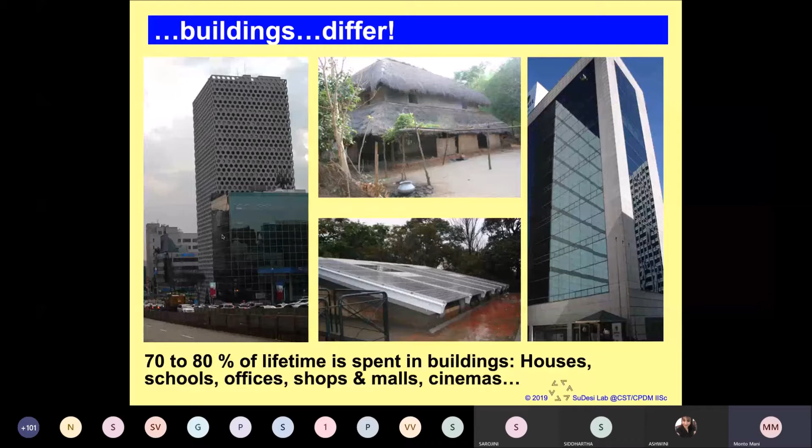Now, with COVID, the environment has also recovered very fast. In fact, we've been able to achieve a significant share of the Paris Agreement in terms of emissions control without doing anything at all in the last 4 or 5 months. So if we relook at the post-COVID situation and the new normal, people's concern towards the environment is far greater now, and the sensitivity of our impact on the environment will also get greater scrutiny. This is good data from a book called the Zero Energy Development Book, where they looked at ecological footprint versus satisfaction with life.

At one point in time, satisfaction with life or lifestyle was measured in terms of our income, GDP, right? How much cement are we consuming? If you look at industry growth, it was measured in terms of cement consumption or cement being manufactured. Today, all of us know the green building rating system actually appreciates us using no cement at all or using very little cement, right?

So ecological footprint is the land mass required to support the lifestyle that we have. So if I'm wearing a cotton shirt, it is growing somewhere, it is getting processed somewhere, it is getting dyed somewhere. So if I start looking at the land area that is required to support the products that are in my lifestyle, my energy requirement comes from, say, photovoltaic plants, which are put in some desert somewhere. So its unit is global hectares per capita.

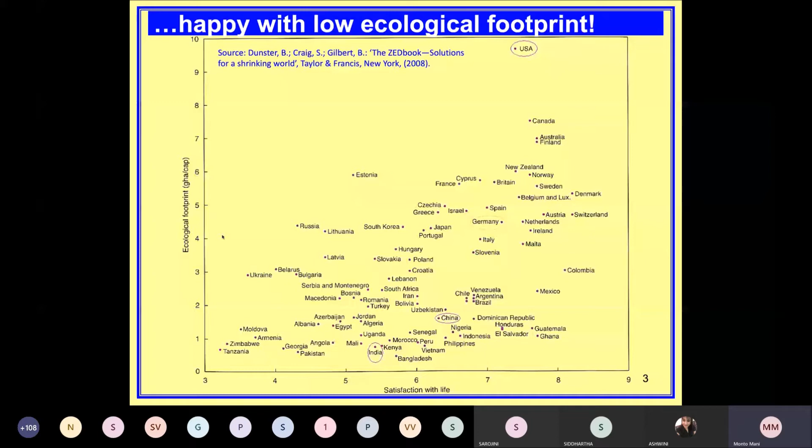And that has also been challenged now with the COVID situation: do we need to travel 2 hours to our offices when we can work from home? Those 2 hours I get additional to spend at home, I can utilize towards something else, towards my children. And at the same time, not carry the stress to office attributed to the traffic that I'm facing, right? So across the world, there is now a relook at reconfiguring the concept of work itself.

Now I will also come down to distinguishing between energy zero and zero energy. The house on the left is a house in rural villages, and that house, when we were starting to study it way back in 2004, did not have electricity supply at all. And electricity supply is the modern face of energy.

Now the question here is, do we call that house zero energy because they don't utilize energy the way we do? Or my lab on the right-hand side, where we are trying to generate as much energy as we consume, and we call it energy zero, right? And then I get points for my green rating system and all of that. So if you see, both the houses are not the same, though we might assume that both are zero energy, right?

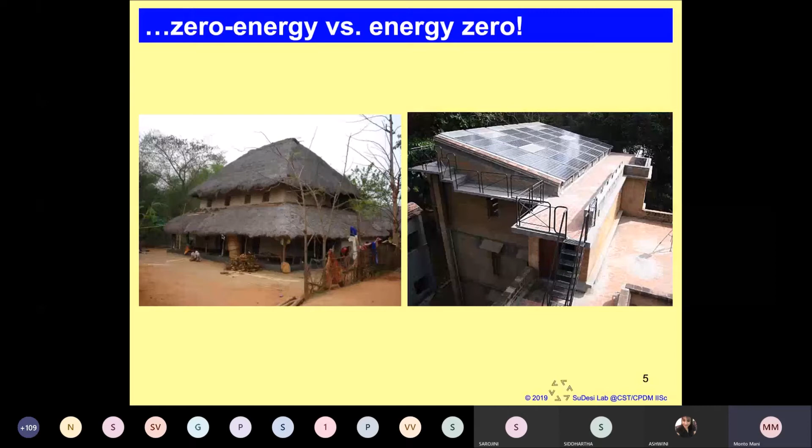And this is where we have another challenge in terms of our energy footprint, life cycle energy footprint in dwellings. If you look at operational energy on the right-hand side, the right-hand side bottom is a vernacular dwelling, where operational energy, that is the energy required to keep your houses safe, well lit and comfortable. Like right now, we're probably sitting in each of our houses with a computer running, light on, or maybe in an air-conditioned office, right? So those all will contribute to operational energy.

Embodied energy is the other factor that is important. It is the energy going into the manufacture and transport and commissioning of the materials that we use in buildings, right? So if you look at traditional buildings, embodied energy is less than 2 gigajoules per meter square, and operational energy is less than 1 gigajoule per household per year. For a city dwelling, that operational energy goes from 1 to 15, and embodied energy goes from 2 to 4. Whereas for a modern dwelling, the operational energy goes from 1 to 42, and embodied energy goes from 2 to 8.

So can you imagine that with India and China having about 1.8 billion rural population, if their lifestyle energy is going to multiply by 42 times, where do we have the energy and resources? It might be good for the economy, but can the economy sustain with the biodiversity and the resources being completely exhausted? So that is also another challenge that we have as to how do we address their aspirations for a modern house without impacting the environment as much. And these are realities that are facing us.

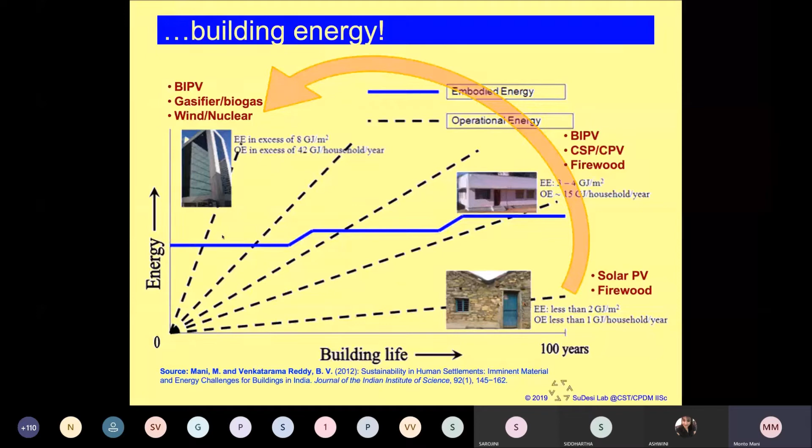Like, for example, in the same village, we see transitions, modern transitions. The roofs change, then the wall changes. And all these transitions actually happen when somebody from the village goes to the city, earns a little more and comes back and he says, no, we shouldn't live like this again. We should live a modern life. And what happens is that as these transitions happen, the houses are no longer as comfortable as they were before.

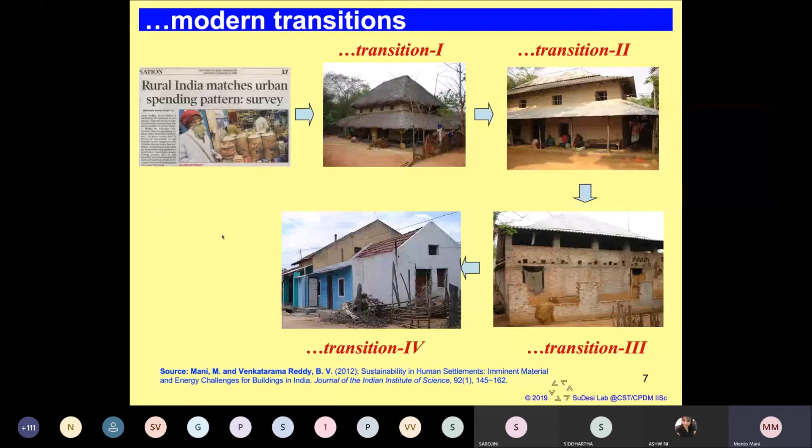So what we had done is in 2012, we had estimated the impact of these transitions on the global carbon dioxide emissions. And we found that the original transition that happens is change in the building material. The geometry, form, orientation of the dwelling remains the same. So just that transition alone causes a minimum of 6 tons of carbon dioxide emissions, because of which it will actually increase the global carbon dioxide emissions anywhere from 5 to 20-25%, right?

The basic baseline level. If we look at them adopting modern houses, going for air conditioning and all, that will actually multiply and worsen even further, right? And government is yet to actually accommodate these sort of projections for realistic estimates of our own carbon emissions or carbon footprint.

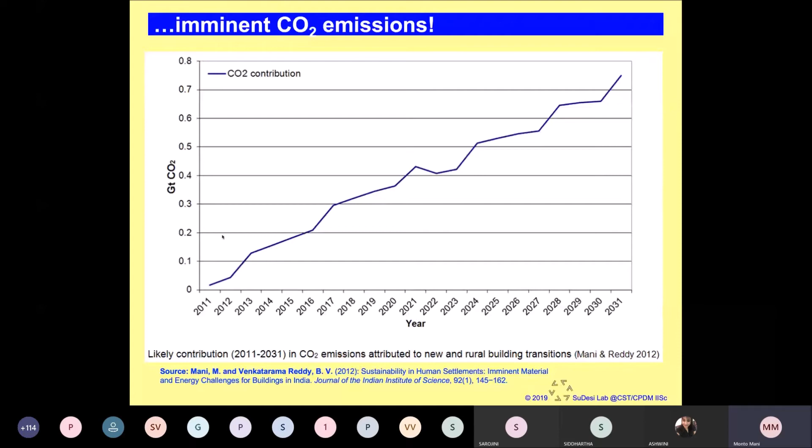This is an estimation of the operational energy requirement, and this is again the baseline where I have based this data on purchasing power, income levels, accessibility of goods, proximity of the villages, and parameters like that. And here one aspect which is important to note is the aspect of rebound effect. What rebound effect states is that with our lifestyles becoming increasingly efficient, our net energy consumption actually goes up.

And a good example is a television. At one time, we used to have one television for a village. It was the old CRT-based television, which we would call very energy guzzling today. But one entire village used to watch Doordarshan maybe 2 hours in the morning, 2 hours in the evening. Everyone used to see only one channel, maybe discuss it. So the community was rather unified there in terms of what they were seeing, what they were discussing, even if it's a cricket match.

Today, you see, we have LED TVs, very, very affordable, and maybe a few hundred channels which anyone can see 24/7. Which means that each one of us has a different preference to a channel. Children want cartoons, maybe the adults would like to see games or some movie. And the senior people want to see some religious channel or something to do with gardening or something like that.

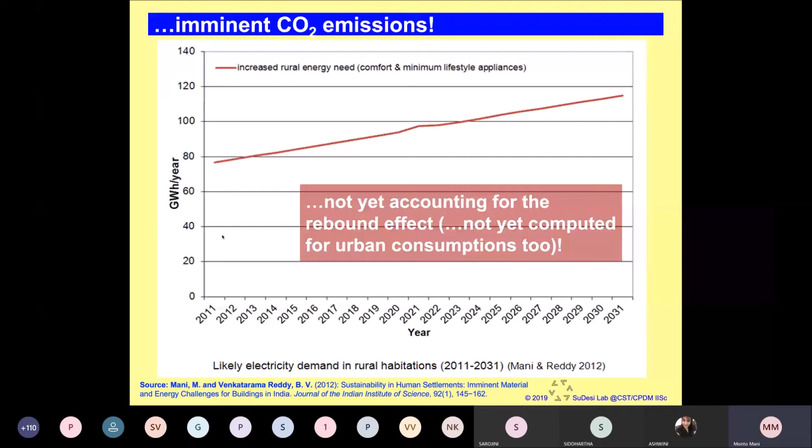Another aspect that we looked at is climate change. And this is again a recent study, it's an ongoing work in terms of how we look at resilience of dwellings to withstand climate change. So one way we can look at climate change is places are going to get warmer or wetter, in which case we look at a shift in the climate zone that the buildings belong to. So take Suganhalli, which is warm, humid, about 90 kilometers from Bangalore, a rural dwelling. If it were to become hot, dry, or if it were to become temperate, then what happens to the performance of the building?

And what we found is that if you look at vernacular dwellings and conventional dwellings, the conventional dwellings are actually showing a greater discomfort in terms of increasing sensation of warmth as compared to vernacular dwellings. And with climate change, we will find that conventional dwellings are going to feel even more uncomfortable than vernacular dwellings. And the same for temperate.

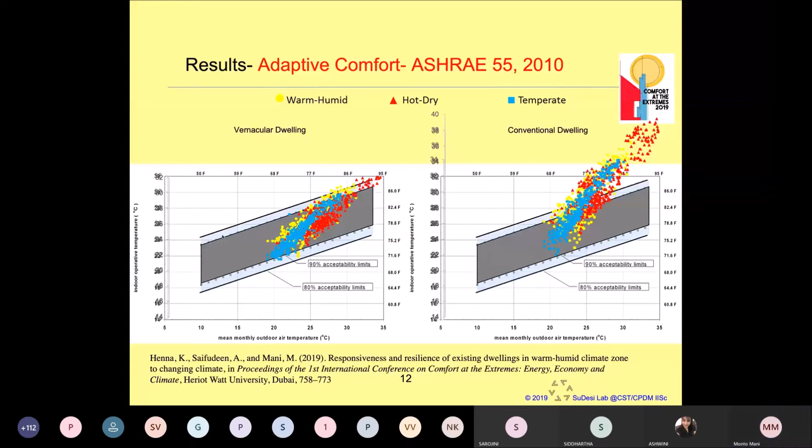Now coming to BIPV lab, people think that photovoltaics are the way forward. Photovoltaics are green and clean, and perceptions like that.

So what happens is that when we look at the performance of photovoltaics integrated in buildings, it is not easy, because when we design a building, we try to design a building to minimize the solar exposure so that the heat gain can be reduced. But when you want to install photovoltaics on the building, you have to maximize the solar exposure, because only then will the output of the PV system be high.

And what happens is, to clear the dust, we use water, and we use about half a liter of water every meter square of the panel area every day. And this is true for all megawatt scale power plants where they now have robots or automated systems to clean. They are coming up with measures to lower the water usage, but we have to understand that this is not recycled water, or this is not seawater that is used for cleaning photovoltaic panels.

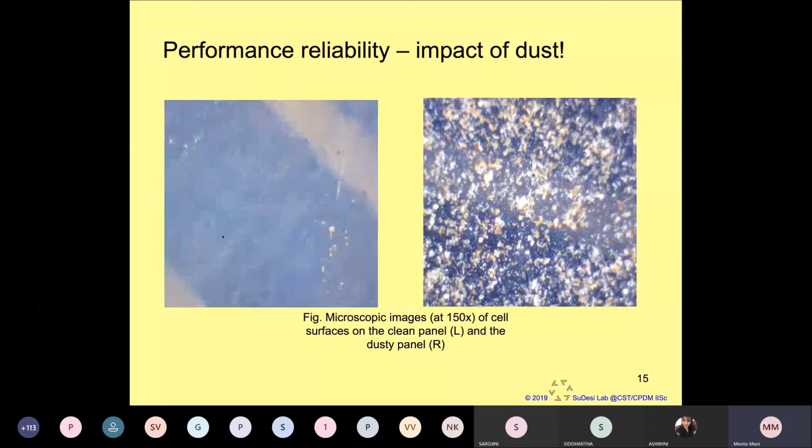And what happened here is that we came up with the traditional palm leaf based brooms which can clean photovoltaic panels without the need for water. And we also tested and verified how they are cleaning under the scanning electron microscope. We found the edges are very hard, so they can even remove bird droppings from the photovoltaic surfaces. So we were able to bring down the water consumption from half a liter to less than 50 ml of water per day per meter square.

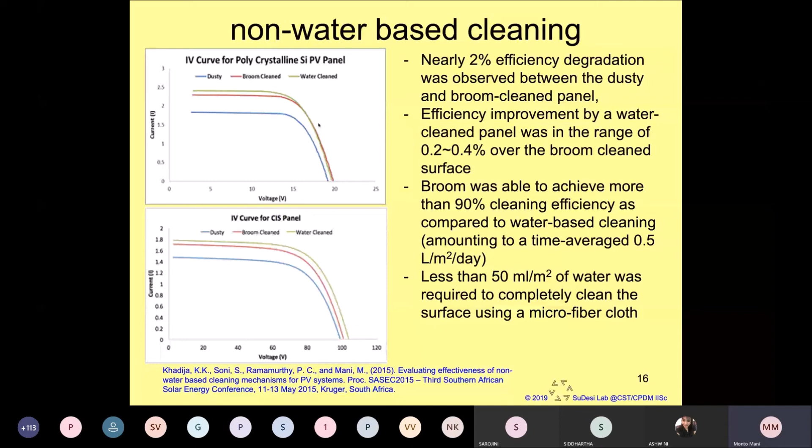The other aspect with the photovoltaic panels, and you will realize it in the next 1 or 2 years, is what do we do with the photovoltaic panels that are discarded? And now the government is coming up with a commission for photovoltaic waste. And please mind you that photovoltaic waste, when sent to the landfill, is extremely toxic. There is a lot of tin, lead, chromium that leaches to the ground.

And India is likely to generate a few 100,000 tons of photovoltaic waste every year, starting from 2030. The world over, how we handle photovoltaic waste is a serious concern now. And if you Google it, you will realize what I'm referring to.

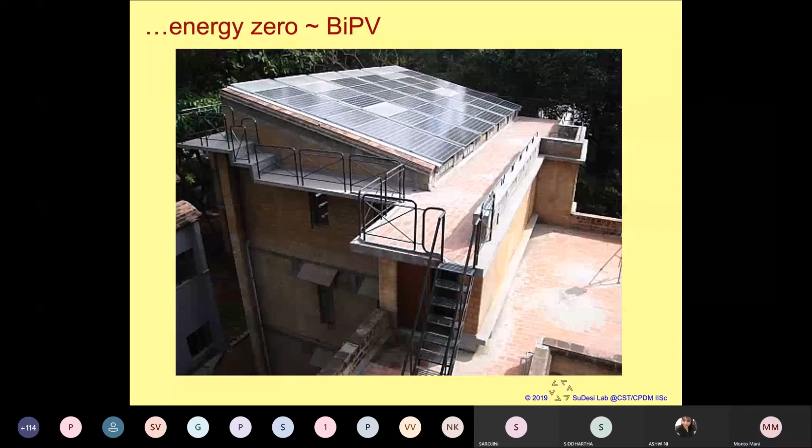Now, with smart buildings, connected buildings, IoT, today computer science people are saying that I can monitor the location of a person in a building based on his mobile phone. Because your Wi-Fi network can tell which part of the building you are in, which means that according to your preferences, your air conditioning temperature can be set, lights can be switched on, computers can be switched on based on where you're moving about in the building, right? The issue of privacy is another aspect which falls in the domain of ethics that I will not cover now.

But the work that we're trying to do here is, if we are going to put sensors in buildings to save energy, then what happens as we go further? So we took the example of a motion sensor connected to an LED light. And we brought in this concept of energy neutrality, which means that if we look at the life cycle energy of a sensor and look at the energy it is saving, in the case of LED lights, what we found is that the energy saved is actually less than the energy going into the manufacture and installation of the sensor itself.

So we are trying to come up with some design guidelines so that there will be clarity on where it makes sense to connect sensors and where it does not.

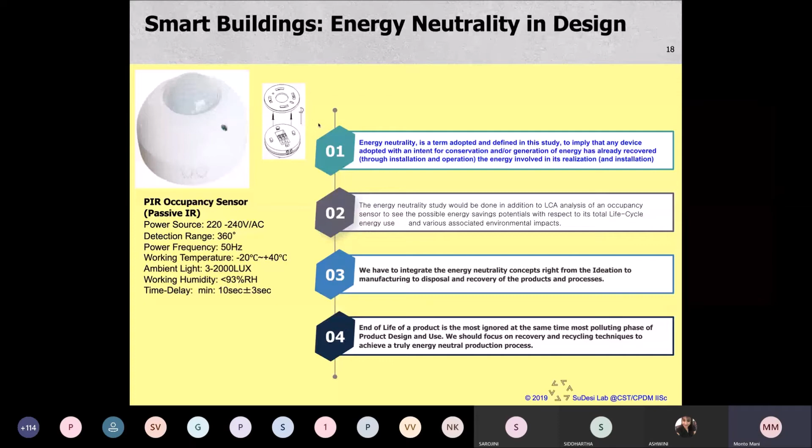So we took the example, like I said, of a motion sensor which was manufactured in Shanghai, and we actually opened up the sensor, looked at the various electronic components inside, tried to see where they are sourced from, looked at their transport energy, installation, and all of that. And finally, we accounted for shipping and the Amazon delivery guy, the packaging material, the bubble wrap, everything we accounted for.

And what we found is that we came up with this notion of gram per wattage ratio, where it is the grams of the motion sensor or the sensor network itself to the wattage of the load connected to it. And what we find is that with appliances being very inefficient, like incandescent bulb is very inefficient. It's operating at 10 lumens per watt, right? Or less than that. The rest of it getting wasted as heat. The potential for us to save energy is much higher when we are depending on inefficient devices.

But today our appliances are also becoming very efficient, right? LED lamps, for example, they are super efficient. So our potential to save energy actually goes down. So does it really make sense to additionally put a sensor there to switch on and switch off based on the need to save energy?

And not only that, what we realize here is that with dependence on sensors, there are behavioral changes happening in us. For example, when I go to my office, I walk into my office, my light goes on. I leave the office within about 15 minutes, the light goes off. And then when I come home, I find that the light does not switch on when I walk in. So I switch it on physically. But then when I leave the room, subconsciously, I keep thinking that the light will switch off. So the whole night the light is on.

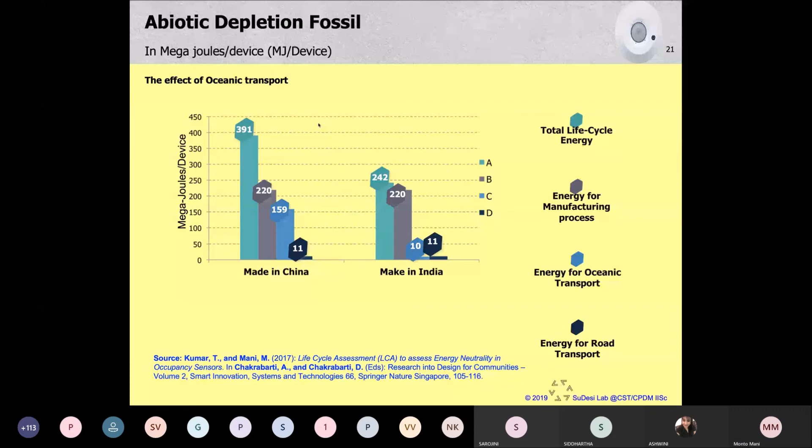Again, the last part, I will just bring up the fact that we have many different lightings, right? We have seen incandescent bulbs, we've seen CFLs, and we've seen LEDs. Blindly, all of us go for LEDs with the notion that, yes, it is good for the energy, it is good for the environment. Because it is using less energy, it is good for the environment. But we fail to see that blind dependence on energy efficient devices could pose other problems.

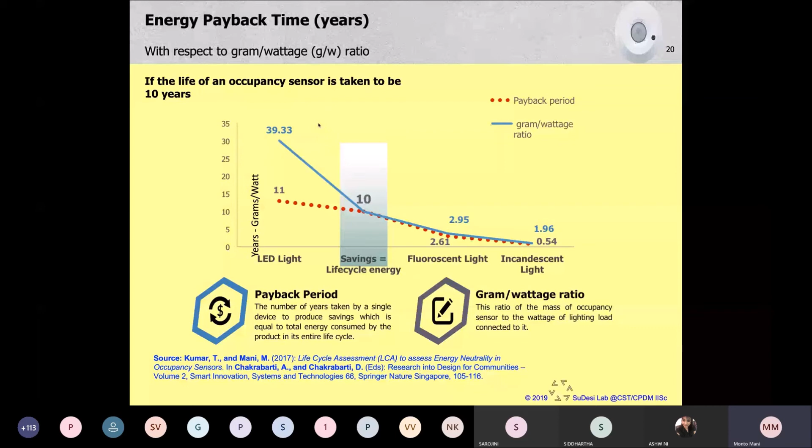And this is what we realized, and I was actually exposed to this by a professor from Germany. She was from the Coburg School of Arts and Architecture, and she was into interior design, right? And she said, Monto, when you work under constant LED light, you are more short-tempered, very impulsive, hyperactive, and have other problems of sleep. Now, mobile phones have the sleep mode where the white screen actually changes to a warmer screen so that it does not upset our sleep cycle.

Now that cool white light that you get from the LED actually induces hormonal changes in the body, causing you to be hyperactive. Now you can be for 20 minutes of the day. Your body can take only that much stress. You can't be hyperactive 6 hours, 8 hours of the day.

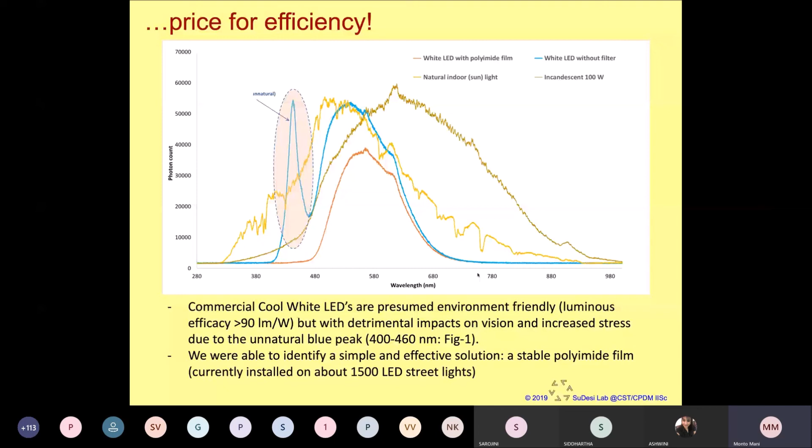So in fact, we published this information so that people can access it. It got published in Down to Earth, so that people can use this. A lot of industries have adopted it. A lot of people have actually written to us saying, I'm having eye inflammation problems because of LED lights, what do I do about it?

So when we look at sustainability, we have to understand that just low energy is not the only parameter, or minimum pollution is not the only parameter. We have to go beyond efficiency and look at effectiveness. The LED lamp is a good example where LEDs are efficient, but are they an effective, safe light for us to depend on? Unfortunately, there is no other way. Industry is trying to come up with various lighting solutions. Even monitors today, they are saying low blue light monitors, blue filter monitors, because the industry is also aware of the health implications of exposure to these radiations.

And finally, I will conclude with this slide as to whether energy efficiency is enough. What about building materials, where we are increasingly adopting exotic materials coming from different parts of the world, manufactured in the name of green buildings? Again, codes connected with unconventional buildings, as in vernacular dwellings, and integration of renewables and dependence on photovoltaics is also a big challenge today. There are increasing concerns about using wind turbines for generating electricity.

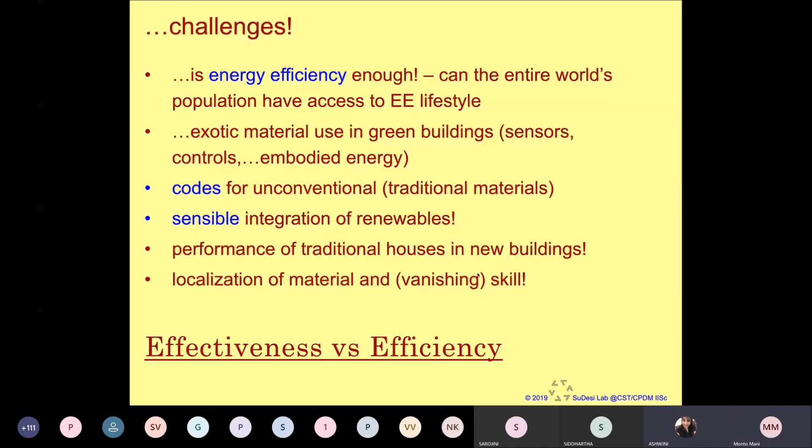So moving forward, the ideology on sustainability is how less can I consume, rather than how much more can I consume and how do I find alternative or renewable energy sources to support my increasingly energy dependent lifestyle. So I will stop with that. And if there are any questions, I'll be happy to take them.